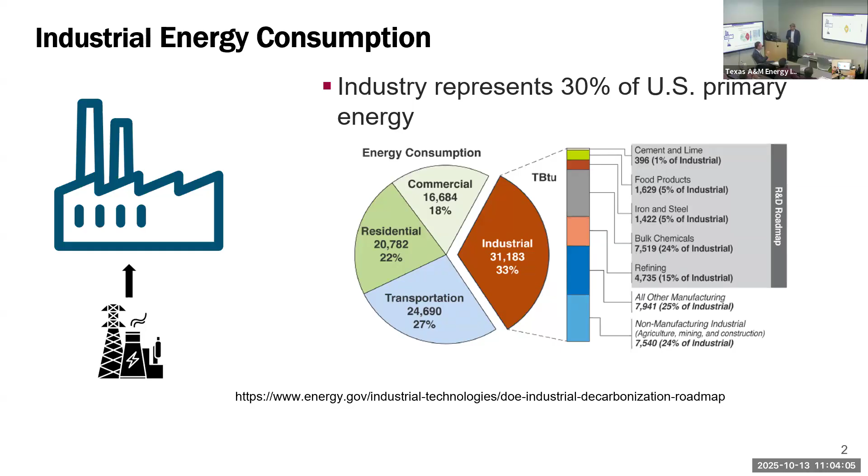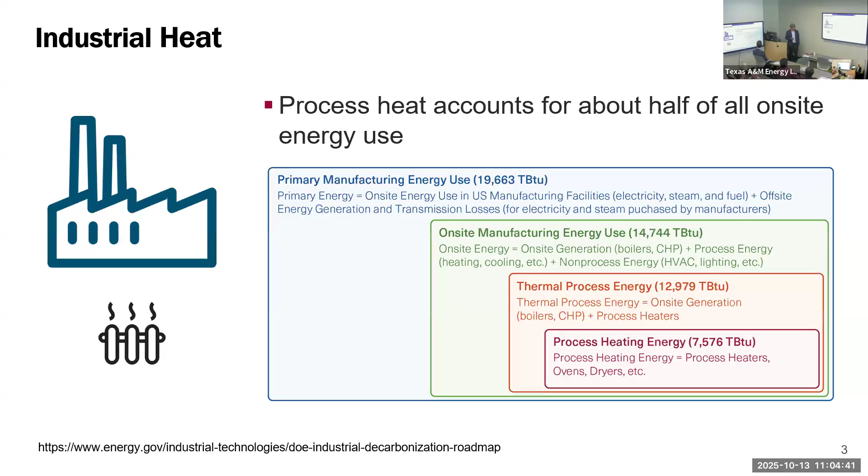That's our focus, looking at these energy intensive industries. Out of that 30%, about half of it is just used for heating things - whether you're trying to smelt iron and steel or bake bread, it's used for heating and reaching the process temperature. That's the focus of our institute. People sometimes think, is it very narrow? It might be narrow, but it's actually a pretty big chunk of all the energy use we address - anything where you're heating stuff up.

This is basically a Sankey diagram showing the comparison of where industrial process heat is used, breaking it down into various areas. Some of it you can also include refrigeration or cooling as part of heating, or temperature change as well - thermal transformers, as I see it.

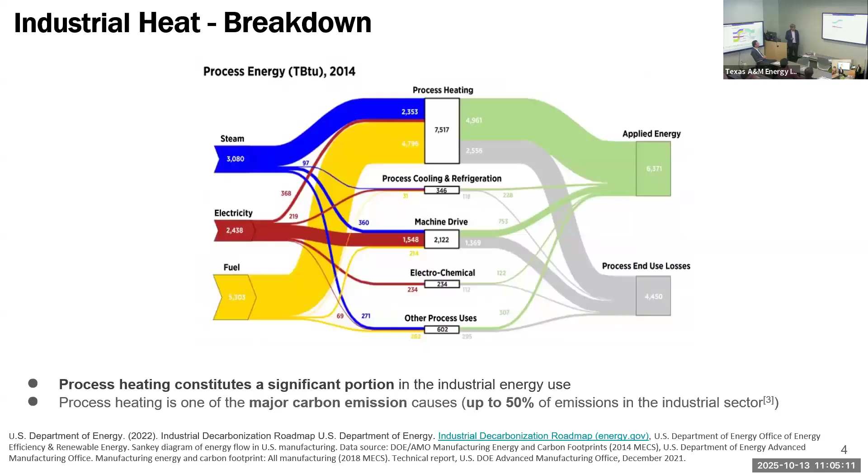The reason this is important is that for energy intensive industries, energy efficiency is a big part of their operating costs. The more energy efficient you can be, the more it adds value to your economics. This is our economic case - for energy intensive industries, it's very important to maintain your energy efficiency and be as flexible or low as possible in your energy costs.

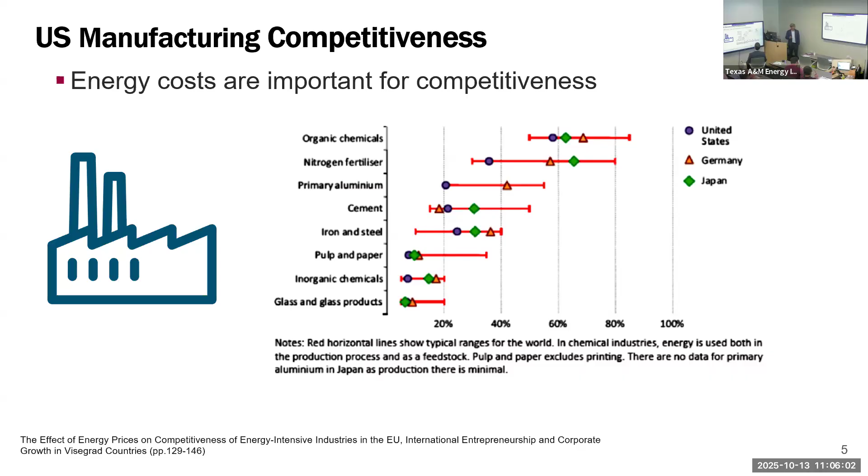This is a comparison between US, Germany, and Japan. We believe the US has a unique position in all the abundant energy sources we have, and how to optimize them in the best possible way in terms of powering your industries.

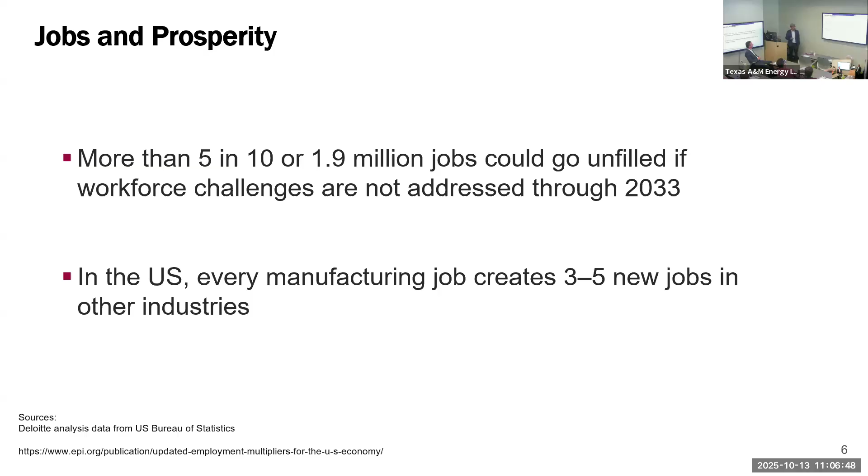As part of this, we're also looking at training people for these industries. There's a challenge in manufacturing - people aren't going into it, and every manufacturing job is a multiplier. For us it's an interesting problem too, because process heating, especially electrified process heating, requires more knowledge of electric power systems and power electronics - it needs electrical engineers in manufacturing, an industry mainly dominated by chemical engineers or material scientists. So it's a unique skill set needed by those manufacturers as well.

So why are we doing this? What are the opportunities and challenges? I've talked about the opportunities, but the challenges are such that whatever we do has to be economically viable - there has to be an economic case, we're not doing it for any other reason. The bottom line of the industry has to make sense. This is challenging because whatever technologies we support have to roll up to some type of techno-economic model, and there has to be a payback, whether that's 5 years, 10 years, or whatever. That's difficult because a lot of things are dynamically changing as we go.

For example, we're getting more and more different types of energy sources into the grid. In Texas, there's a lot of wind power. In Arizona, we have potential for solar at scale. The government is promoting nuclear, hydro, and geothermal - all that is getting into the mix, and they all operate under different conditions, so that's changing our grid mixture as well. We also have different types of grids being developed - islands, microgrids, national grids, behind-the-meter systems - all of those are changing too, developing different opportunities.

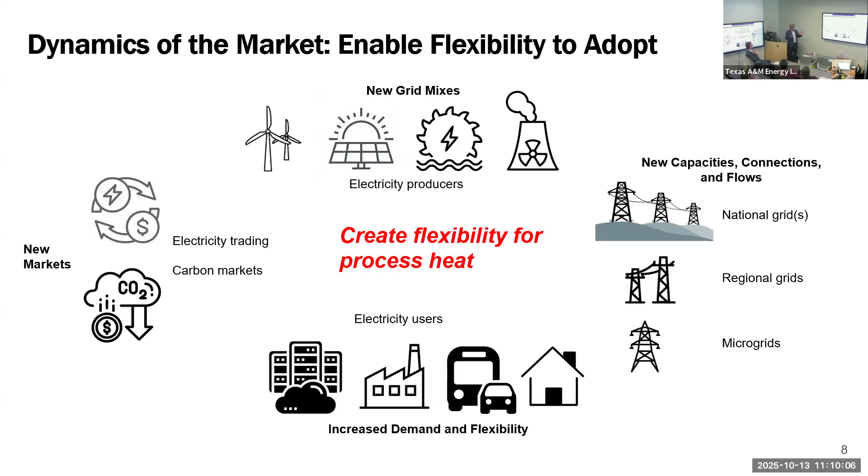So we need to adapt to all of these things as they change, and it's going to change the viability of technologies as things go on.

So basically, what we are looking at is how can you power manufacturing using all the various sources of energy and be as efficient as you can. If you look at the current government's priorities, it's hydroelectric, geothermal, nuclear, and also hybrid heating technologies.

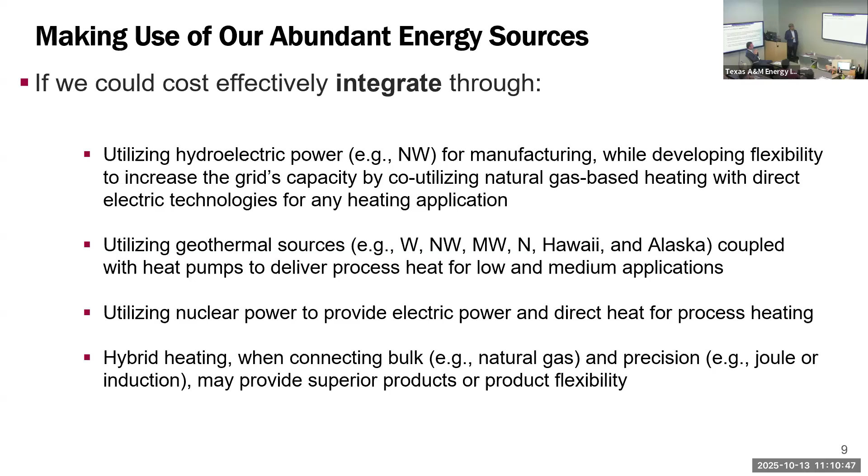So if you're looking at something that might be conventionally heated with combustion, can you precision heat certain parts with other ways and make the product better, or produce more flexibility in terms of raw materials? Those are the types of opportunities we are thinking about.

So what we are is a public-private partnership, and our name, which recently changed, is Electrified Processes for Industrial Excellence. When we first developed this institute, Mark and Stratos were part of it, and we developed this acronym.

We've tried to keep the acronym but change the name so that it reflects the priorities of the government. So we are the DOE's 7th Manufacturing Innovation Institute, and it used to be called Clean Energy Manufacturing Institutes, but the DOE has now forbidden us from using the word 'clean,' so it's Manufacturing Institutes.

And what we are is a public-private partnership. So we have over 150 companies, and you'll see why we include the entire supply chain—utilities, manufacturers, technology providers, etc.

We have a federal budget of about $70 million over 5 years—let's see if those 5 years last or not—and we have about an equal amount of industrial cost sharing or state cost sharing to do what we want.

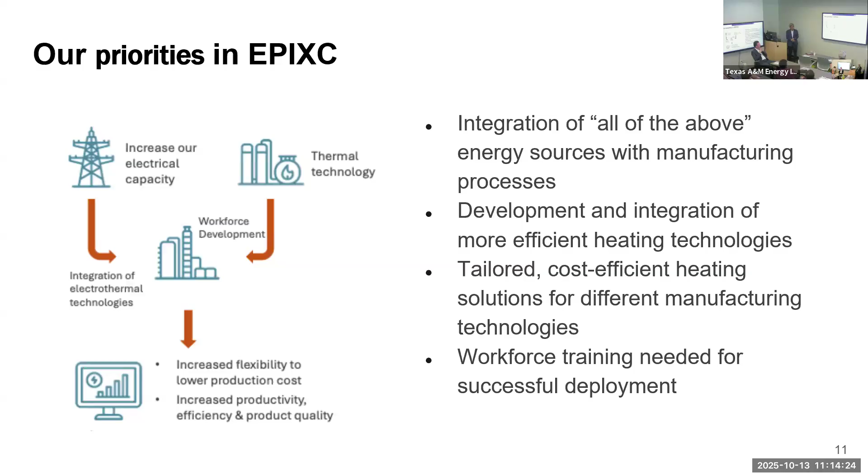And finally, we're also looking at what type of training do we need to develop to deploy these in the field.

So our mission kind of makes sense. It's basically accelerating the adoption of electric and hybrid heating technologies. But more than anything, we really want to develop an ecosystem where we bring in different players together that otherwise would not be working together. So how do we create that type of an ecosystem? You'll often find that it's not just a problem for the manufacturer, it's also a problem for the utility. So how do we get projects together where the utility finds a gain, the manufacturer finds some win, and the technology provider as well, to develop a systems level project that there's a win-win? That's the kind of sweet spot that we want to be in, not just one-off projects with a single company.

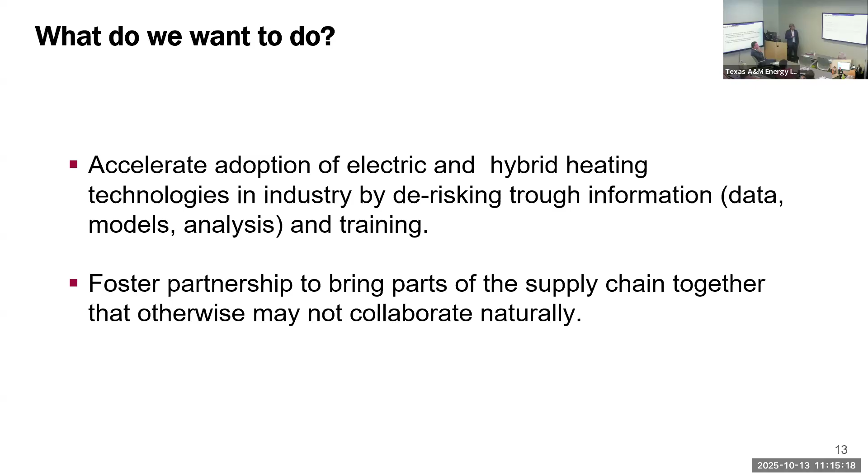So we want our technologies such that, in the end, they provide a cost-effective solution, either reducing operating costs, and also our solutions should be somewhat scalable, to various types of sectors.

Essentially, we look at it as if you have all kinds of sources of power. Some are intermittent, some are continuous. You also have all kinds of sources of heat, some continuous, some intermittent. How do we combine all of that to power the factory that we need or supply the heat needed, and then, of course, the integration of that heat into our manufacturing processes.

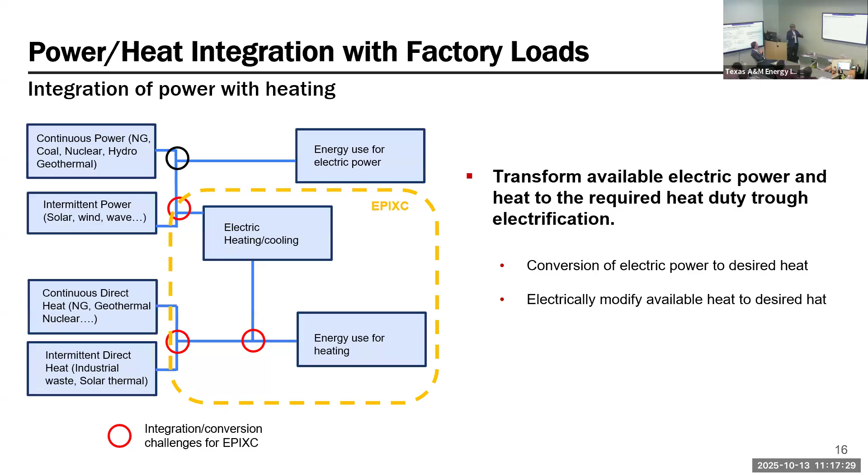Electric heating has some unique advantages and challenges because in combustion heating, you can flood an entire chamber and you know what the temperature is. With electric heating, you don't always know that, it's interacting with your material. If you're microwaving potatoes and carrots, they probably end up at a different temperature. So you need to look at how the dielectric and other properties, electromagnetic fields, interact with the material. All of that has to be looked at.

We are also looking at questions of that integration in terms of industrial flexibility. What would you want to do? Some industries want steady state operation, they want that power when they need it, not just when the sun shines or the wind blows. So there's an extra cost then, where you have to basically provide the base load, whether with some type of storage system or otherwise there's a cost to that. Other industries are interested in synchronizing their production with the power of the grid and the cost of electricity.

So that's the other way we are looking at it in terms of a systems problem. For example, there are breweries that operate boilers in tandem, an electric boiler and a gas-fired boiler, and they're able to switch almost on a day's notice based on electricity prices. Electric arc furnaces operate whenever it's the cheapest possible way for that electricity to operate, and what type of agreements they get with the power producer. So those are systems level problems they're interested in.

At UT Austin, they're also doing some interesting things in terms of grid synchronized distillation, like can you separate different things at different powers depending on the power usage and the power costs?

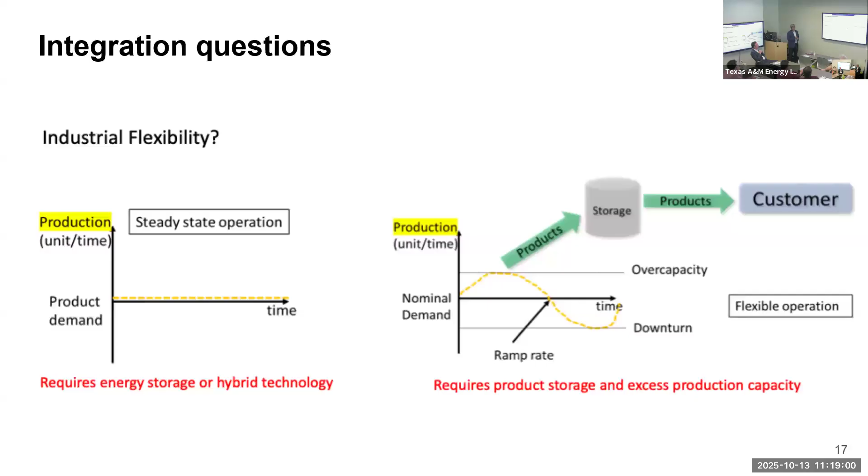So originally when we stood up the institute, our goal was to a large extent decarbonization. Our projects all had a metric that said cost of carbon abatement — you're going to abate carbon, now what's the cost of that, can you bring that down? That's no longer a priority for the DOE or the US government at the moment, so we had to pivot. Our primary metric right now is efficiency. The way we're looking at that is per unit energy spent, can you produce more products? If you're spending a certain amount of kilojoules or watts, can you increase the amount of products you're producing for that? That's our prime metric.

Now, those of you who are thermodynamicists, see, there's a fallacy there. If you just operate near the second law, you don't produce anything, but you'll be very efficient, right? So you do have to maintain a certain productivity — that's a caveat there. But that's our baseline for being energy efficient. And it's not that difficult in a way. This has given us opportunities to work on some areas that we couldn't before.

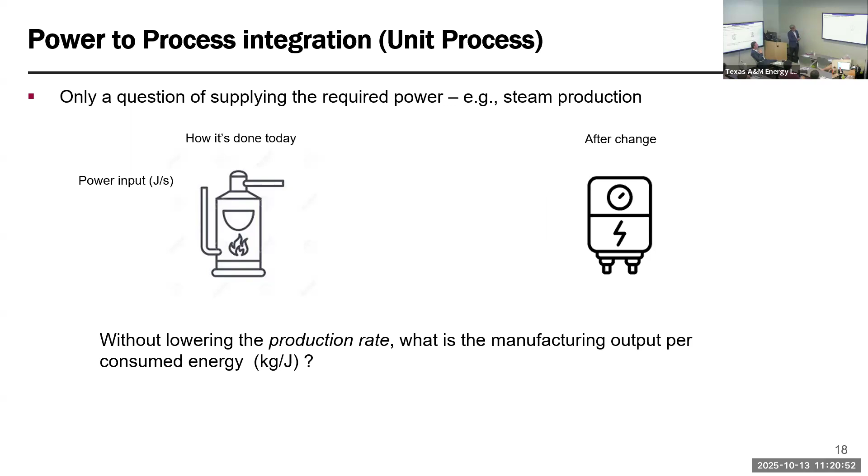If you take things like battery slurry drying, for example, it's not a big decarbonization problem, so we couldn't get into that. However, if you're replacing slurry drying with, say, laser technologies, you can produce much more. Even though the electricity price is higher for laser-based heating, your throughput is higher, so that's an economic interest. We're able to get into areas that we couldn't get into before because of this as well. So that's the very basis of what we're thinking about.

Now we have to think about some other things here. There are some non-energy challenges and opportunities as well — it's not always a one-to-one replacement. If you take my own area, say iron and steel, one big area of energy intensity is rolling of steel. There are opportunities — you'd be way more energy efficient if you could induction heat a coil, because you're just heating what you're heating and nothing else. You'd almost reach the thermodynamic limit. But the problem is you don't know whether you're getting that same quality, so we have to make sure the product quality is the same.

In some cases it could even be better, because you can heat what you want to heat at the temperature you want to heat, so you might be able to create microstructures that you couldn't before. As an example for steel making, you conventionally heat it in a reheat furnace in a combustion atmosphere and end up with a lot of oxide scale. That also limits the amount of recycling you can do, because steel scrap contains copper, and when you oxidize the surface, that copper prevents you from making high-grade products — it creates cracks on the surface. That's probably the biggest problem for scrap-based electric arc furnace production.

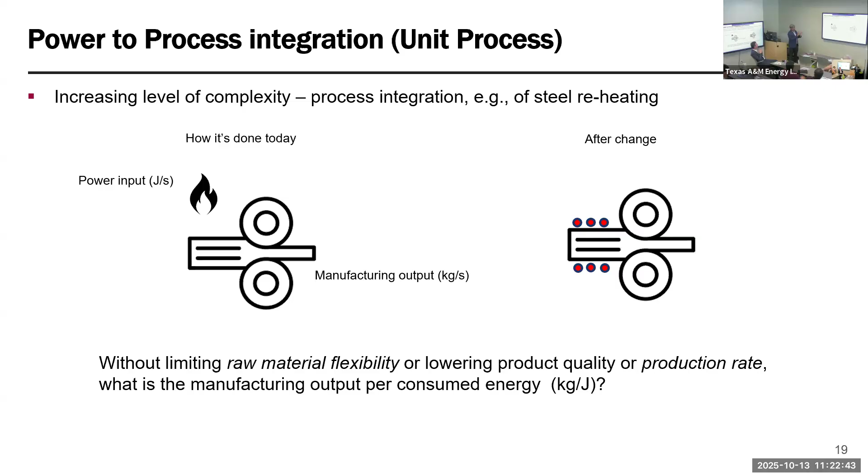Now, with electric heating, you could potentially operate in an entirely inert environment, where you don't create any scale, and you could get a better product out of it. Even downstream, if you're looking at annealing, you could create all kinds of quench structures that you couldn't before that would add to your product value, so to say. So those are the kind of opportunities we're thinking about.

Now, in a systems-level integration, if you go one step higher, you can't just limit it to that one process — it's not a one-to-one replacement. You have to think about the fate of the fuel gas, heat integration, the available power. Somebody mentioned very accurately that most plants have already done their pinch analysis, so whatever heats and sinks are going on, you're using it somewhere else. By electrifying one part and not using the rest of it, you might have to provide more power. Any of you who have an electric car and try to use the air conditioning or heating know it doesn't last as much as a gas-powered car — it's pretty optimized, so you have to look at it from that point of view.

On the other hand, you might get gains, such as fewer moving parts, process flexibility, all that stuff that has to be replaced. Some interesting questions have come out of this that we didn't think about originally — one of the limitations from industries to adopt technologies is sometimes not even the cost, but it's the downtime.

It takes a certain amount of downtime for them to replace their systems, and there's a loss of productivity there. One thing they've asked for is, can you create a model for us, depending on the facility, that would predict the expected downtime to replace equipment? Take something simple like a boiler for a beer producer or distillery - how long would it take to replace it? That includes all the logistics, since sometimes parts come from Denmark, Sweden, or Norway. How long do we risk not operating, or do we wait till something's broken anyway? Those kinds of questions have come up as interesting problems for us.

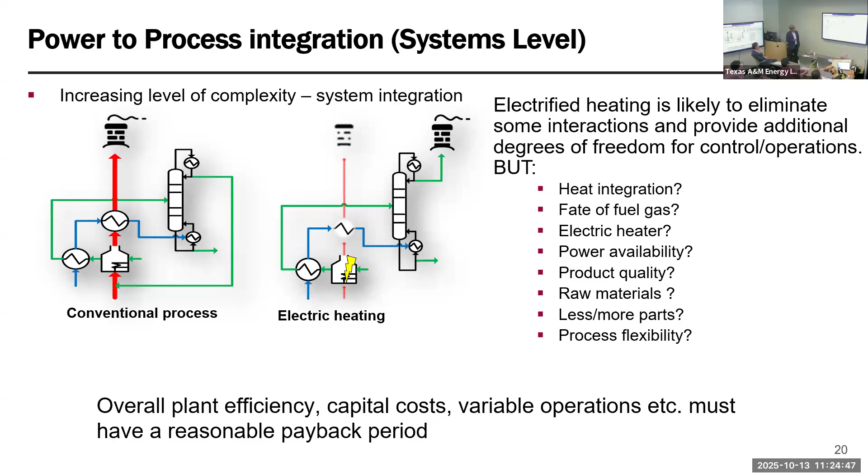As a summary, any project we do primarily has an energy impact, and then there's a non-energy impact as well. We also had a non-energy impact on emissions - but that's another word I can't use anymore, so emissions is not in my vocabulary. In the end, you can imagine you also get less particulate emissions, whether we want it or not.

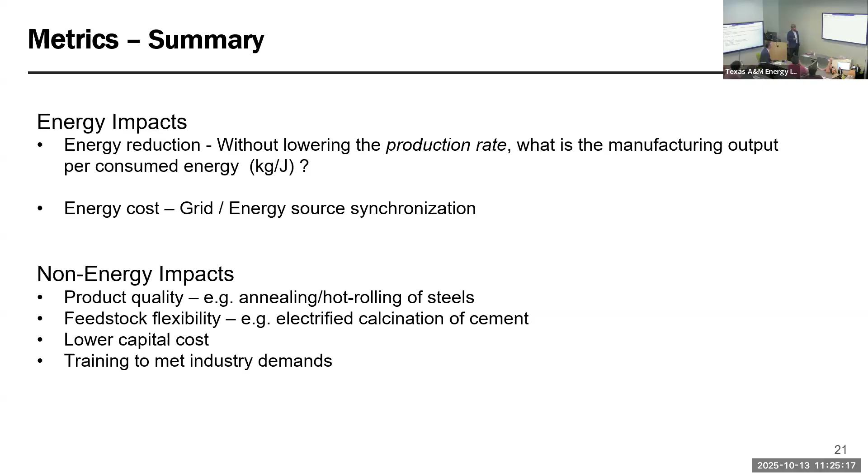Workforce challenges - so I don't look this way, but I'm actually Swedish. This is in the very, very north of Sweden. If you think about where you'd produce and have the next industrial revolution, it would be there. You have over 70 terawatt hours of electric power, and almost all the natural resources you need in terms of mining and ore. Problem is, if you've ever been there, there's more reindeer than people - there's nobody to work there.

So the workforce is a problem. We've created our educational institutions around where there was coal, water-based resources, stuff like that, but those aren't necessarily where industry is growing. My own interest is iron and steel - if you look at where all the major iron and steel educational hubs are, they're all in the Northeast. But guess where it's growing faster? It's actually Texas in the South, and you don't have a single steel hub anywhere around these areas. So there's a redistribution, and people from the North don't necessarily want to move. There's a workforce challenge.

We can develop a perfect place to build a factory, but it doesn't mean we have a workforce there. I was in Oklahoma a few weeks back, and one of their questions was, we have so much abundance of natural gas, why don't we become Texas in terms of a manufacturing hub? But one limitation is they don't have the educational institutions like you guys have here - training people and the workforce is a limitation for industrial development.

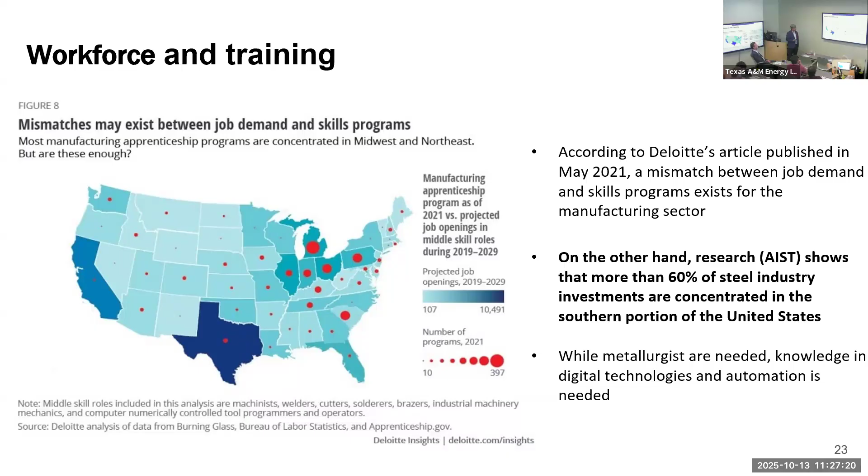This is a graph I put together for AIST, the Association for Iron & Steel Technology, that basically shows where the educational programs are - all in the Northeast - but the growth of industry is along the South and Texas. There's a mismatch there. That's a case I'd make for the government, that they need to redistribute educational programs more to Texas and the South.

We do have a manufacturing education program within EPIXC as well, partnered with the other 18 or so manufacturing institutes. We develop skills from the very base level all the way to PhD in all kinds of ways. I wouldn't say it's that well developed yet, so this requires some work, because a lot of these institutes are put together by academics and scientists who don't necessarily know how to train apprentice programs and pre-apprentice programs, which is really what we need.

Any thought about dual vocational programs, Sridhar, or emulating the Germans, since I know you're familiar with them?

We have tried some of that. One challenge, I guess - and we've talked about this with the institute director - is that in Germany there's a culture for industry to take pride in doing this. You can call up Thyssen or Salzgitter and say, hey, we're doing this, and they'll feel shamed into supporting it. In the US, it's so difficult to get industry to actually buy in and commit cash to programs like that. We've tried with Motiva, we've tried with all kinds of industries, but for them to actually join a program like this and pay for education is a challenge. At least three US presidents have spoken about the value of dual vocational programs, starting from the Obama administration.

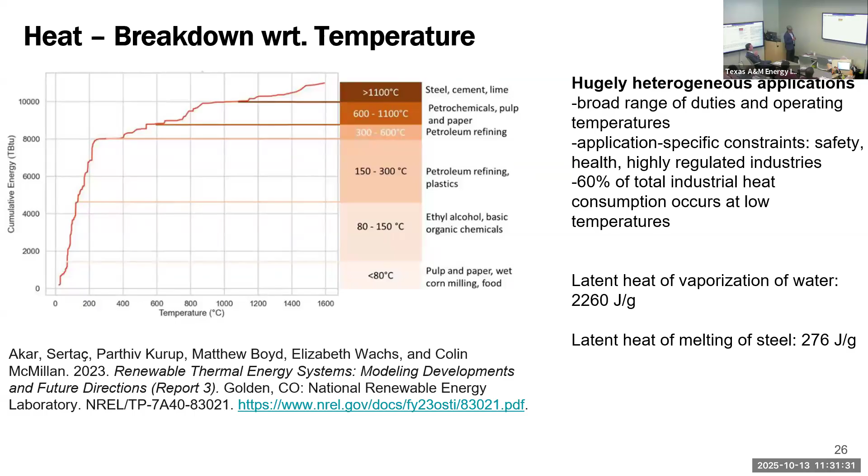I'll show this graph later, so I'll come back to that.

So we're also thinking about what might be co-benefits of electric heating, and I mentioned some of this before. You can control the heating where you want, how much you want, much better. And you might have a lower cost of capital for parts, and you might be able to differentiate your product, as I mentioned earlier.

So our goal is to look at - there's going to be a higher price, especially in the US, it's very difficult because of natural gas prices, right? I was over in Denmark a couple of years ago for a US government trip. Denmark's industry is all electrified, so is almost Holland's. And we were trying to understand how they made it work economically, and whether any of that could be replicated in the US.

So first they'll tell you all this stuff about moral commitment, ESG, all that. But if you keep asking them, that's not it at all. It's because the EU has very strict rules that they have to decarbonize. So they don't have a choice. So they have a 10-year rate of return for the technologies.

Second of all is Ukraine - they don't have the cheap natural gas they used to have. Third of all, they have this enormous battery from Norway and Sweden of hydroelectric power, and then they can base that and supplement it with their own wind and solar to basically be carbon neutral.

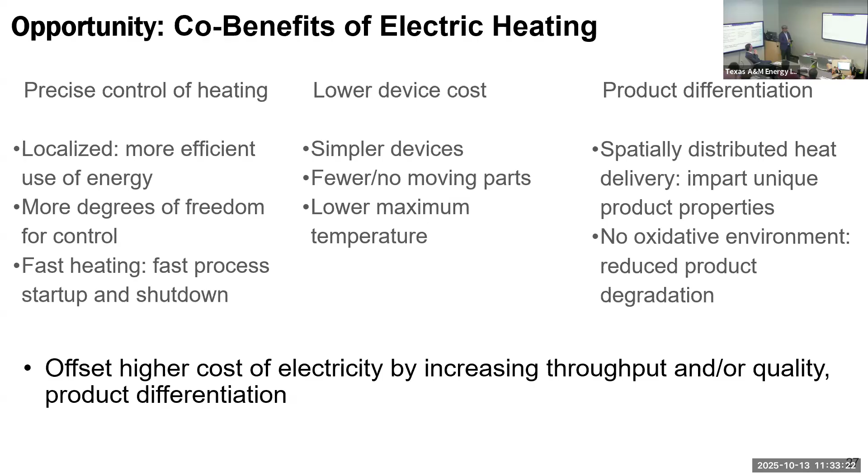There's an economic case there. We don't have that in the US, and the US is so broad that there's differentiation wherever you go - there's diversity in electricity sources. So we have to think about it as a regional problem, right? If you're in the Pacific Northwest, you might have access to a lot of hydroelectric, but the rest of the country is dependent to some extent on intermittent sources, and beating natural gas is hard.

So in terms of our roadmap, one of the things we looked at is, if we look at many of the different things our stakeholders are doing in terms of processing, and then looked at the average heat duty per kilogram product, what are the areas that would make the biggest impact? We found that the major source of energy use is just making steam, for all kinds of purposes. It's not that much of a romantic problem to look at compared to, say, iron and steel, but because of the vaporization energy and the latent heat of vaporization, steam is the biggest source of energy usage. That's been a focus for us.

Steam is also, to some degree, a lower hanging fruit for us because there's a lower amount of risk. You produce steam and move it somewhere else, but the manufacturing process doesn't care how that steam was made - whether you heated it with natural gas or electricity, it's still the same steam, barring some water quality issues. So it's lower risk. Whereas if you're thinking about integrating a plasma furnace for heating or something like that, there's a lot more risk because you may cause all kinds of issues in the manufacturing step itself. So steam usage seems to be a lower hanging fruit for us to work on.

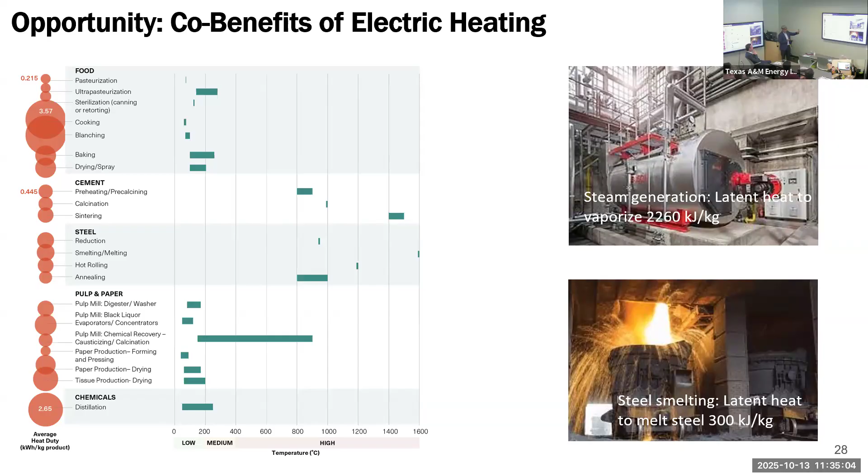Now we looked at all these different heat duties - this is how much heat it takes to make something - and we tried to match that with the different heating technologies available and what they can achieve today. There's a limitation to what is reported in literature. For example, heat pumps, electron beam melting, whatever you take, there's some limitation that allows them to only go to a certain degree.

What that limitation is, is interesting. While we can't go into that granularity, I think it's an interesting question because it may have to do with the power systems, the power electronics that can power a plasma unit. It might have to do with the alloys that work as a heat exchanger. But there are all kinds of reasons why these are limited to a certain power.

One very interesting question that came up in one of our workshops a couple of weeks ago in Austin was that one hesitation companies have in adopting these technologies is the supply chain. These supply chains don't always exist in the US - they come from abroad, and we don't even have the automation engineers or repair engineers to repair a lot of these technologies that come from Danieli in Italy or from Japan. So that's a hesitation they have. Even heat pumps - a lot of them are produced by Danfoss in Denmark, and we don't have the repair engineers to put those in. So that's a hesitation industry has from adopting them.

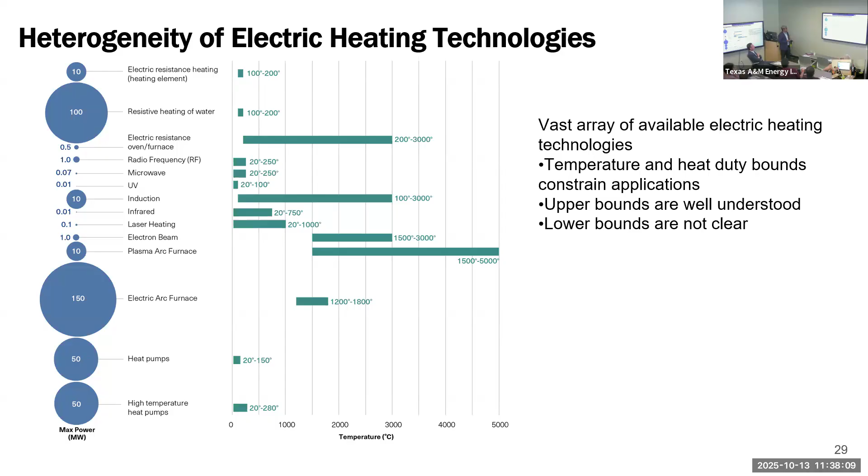So that came up as a prime reason why industry is not adopting them. Many steel industries, for example, demand that you have 2 or 3 alternative suppliers for a technology before they adopt it - it doesn't matter if the technology works or not. And we don't always account for that.

This is a graph, or a chart, that my colleague Michael Baldea from UT Austin put together.

This is where we got information from all our stakeholders, but there's a lot of white area here that we don't have information about. It doesn't mean it doesn't exist, but there's stuff we have to complete in terms of other technologies that can achieve certain things that just haven't been reported yet. There's no physical or thermodynamic law saying they can't do it, it's just not been explored yet, whether those areas can be looked at in terms of technologies.

In our legacy industries, it's still looking for alternatives? Absolutely. For reasons that may not be obvious, for example the steel industry in the US. There's also an interesting problem in England. I was contacted by Wales because they're trying to put in an electric arc furnace, and somebody asked, can we buy an electric arc furnace? Sure, you can buy one, but you need the power to power it, right? That's the problem. Everybody can buy an electric arc furnace.

So they're trying to look at Swansea Bay and all this stuff in terms of what they can do to power that system. I have my doubts, but we'll see. In the US we operate around 110 or so electric arc furnaces all around the country, and these are the mini mills, as they're called. They're at such a scale that it doesn't make sense to build an entire power plant like you can in an integrated plant, which are actually energy producers, right?

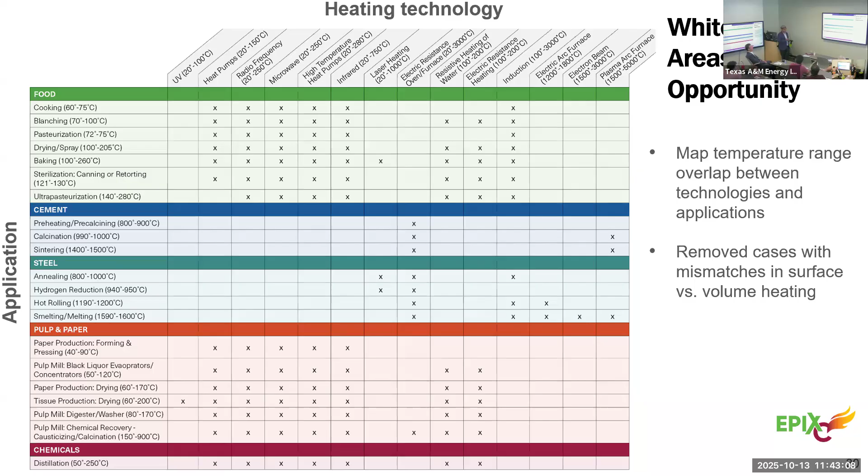So some of our ongoing research, I just want to highlight. Let me know how much time I have? Five minutes. Okay, I'll finish quickly.

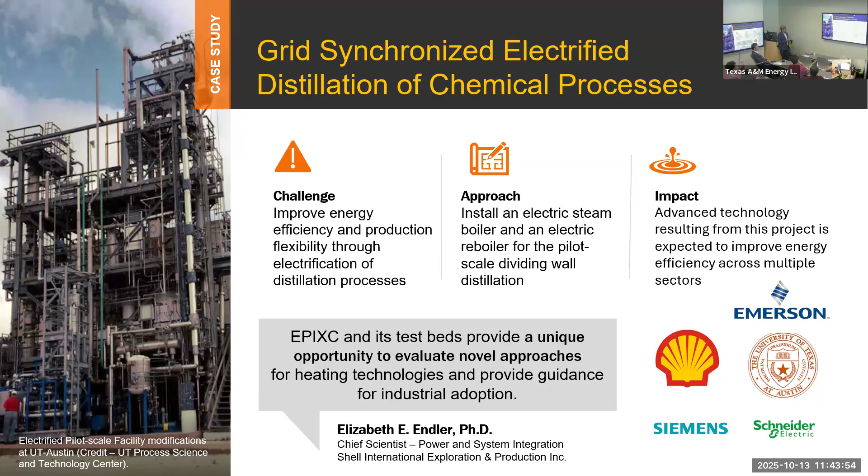So essentially, we are looking at distillation with e-boilers in tandem with combustion boilers to see if we can produce different products at different power systems, basically synchronizing production with the price of electricity. This is the system being built at UT Austin. If you ever go there, please have a look at it.

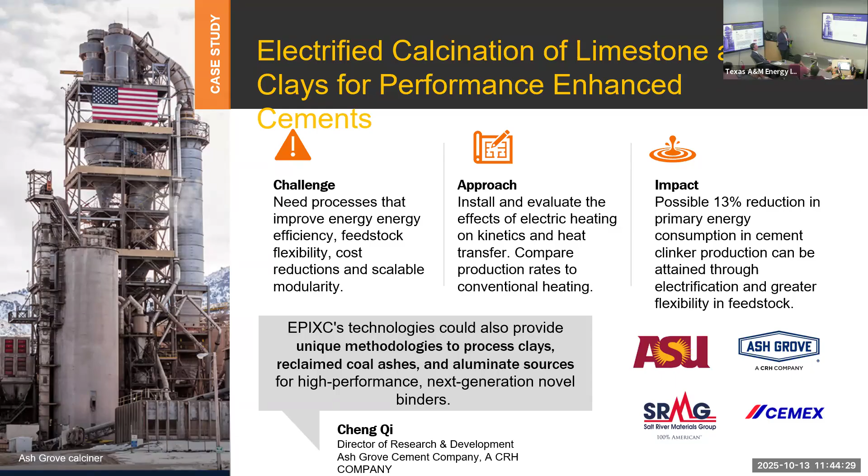It's pretty cool. Another project is being built at ASU - it's basically a calcination reactor, an electric calciner. The value is that with electric heating, you can have more uniform heating, so you can use a more flexible set of feedstock, like clays and stuff. That gives you feedstock flexibility which gives you overall product cost effectiveness.

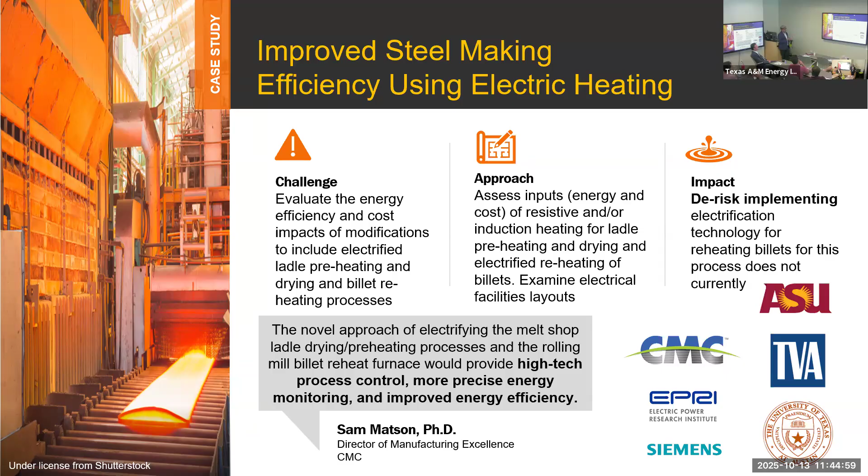Just a kiln. This is a project in Tennessee, a collaboration between TVA, CMC Steel, EPRI, and Siemens, where we are looking at electrifying the reheating process and preheating of ladles and coming up with an economic system to make sense of that. They have a decarbonization goal, so that's part of their incentive, but whether we can present that to DOE or not is different. We are building a pilot scale rolling mill that's actually heated by resistive heating and induction heating, and this would really be the first one of its kind.

Few minutes left. In the end of the day, I'm a scientist, so I have to show something geeky, some research stuff as well. This is actually not funded through EPIXC, it's funded through basic energy sciences.

One of the biggest problems the steel industry faces - you've probably seen a lot of literature around H2 DRI and stuff - is that it cannot be scaled. The reason is that DRI relies on very high-grade iron ore. If you produce iron ore that has a lot of gangue in it, that cannot be cost-effectively processed in electric arc furnaces. So if you wanted to look at an alternative way of making iron and steel, it doesn't work.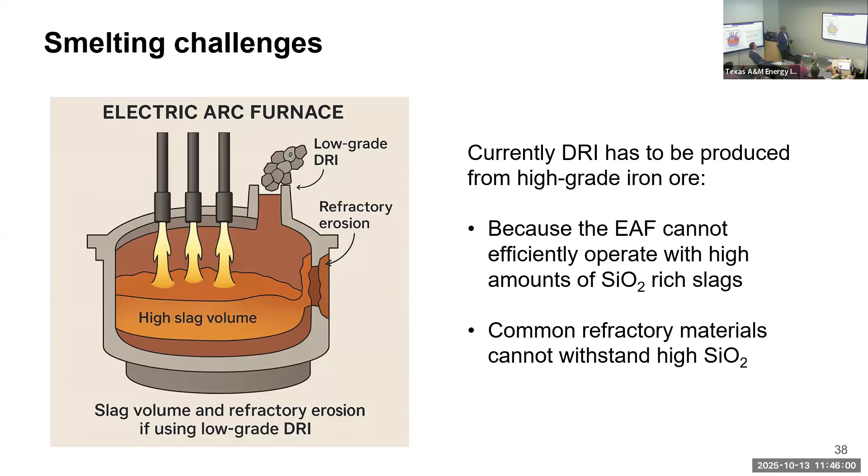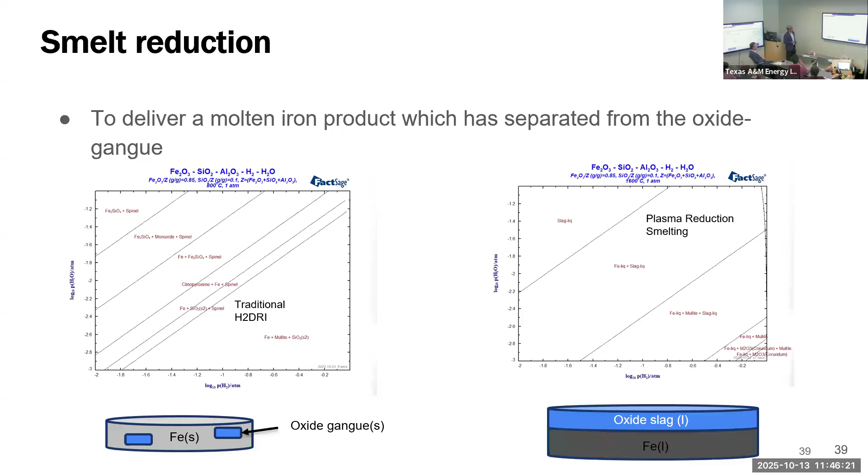The only way to do it is to develop a smelting technology where you separate the iron product from the gangue. Ultimately, traditional DRI produces iron, but it has a lot of gangue inside it that cannot be used in the electric arc furnace. What you want to do is produce a product where the iron is separated from the gangue. One potential way of doing that is plasma smelting.

Plasma smelting has two advantages. Number one, the radicals you get have a higher kinetic potential for reduction, so you could operate at much higher efficiency. It also provides the power, the amount of energy to basically melt everything. And the molten oxides, which are like lava, are immiscible with the iron. So that's a technology we're looking at.

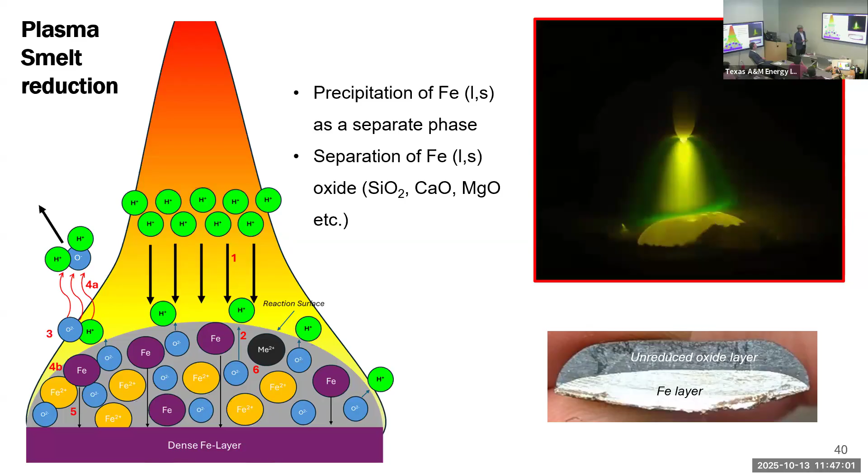It's not funded through EPIXC, but by DOE's Basic Energy Sciences, and UT Austin is part of this as well - they're doing all the plasma modeling. This is just a sample that we produced out of that process.

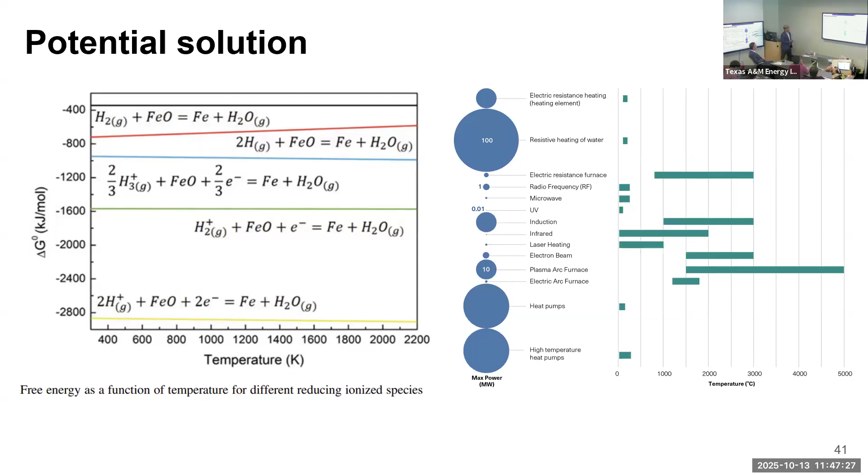Some advantages of plasma smelting are that the free energy becomes exothermic as opposed to endothermic, so the energy efficiency is there, and you can make use of these particles. Plasma, on the other side, has the potential of scaling up to the amount of power that you want. There are some power electronics limitations, but plasma itself can do it.

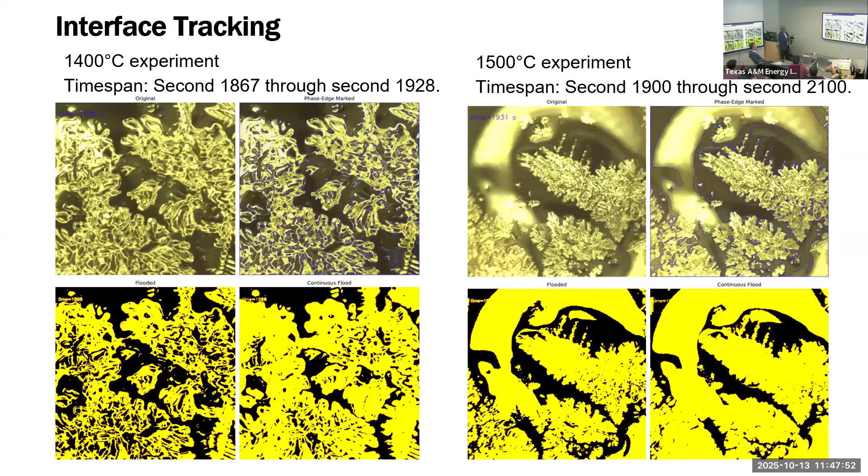This is just examples of the reduction we've done, and we've shown you can improve the kinetics with plasma. We also have ways of imaging how the metal precipitates at high enough temperatures - this is real-time imaging of how iron crystals are produced out of molten oxides, some cool images of high temperature microscopy that I have to show.

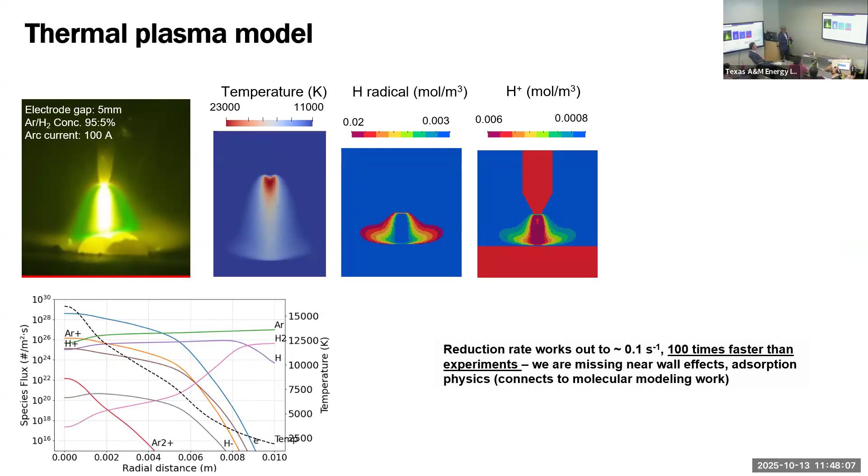Anyway, so plasma modeling of the reactor is done in Austin, and they're connecting with the metallurgical model. Since it's basic energy science stuff, we have to get into all of that.

I'll summarize there. So basically EPIXC is an industrial consortium - it's for industry, run by industry - and we are trying to take advantage of advanced electric heating for the benefit of industry. At the moment, chemicals and metals are our main core sectors. Some underdeveloped sectors we are looking to develop is food and beverage - we don't have enough food and beverage companies, but that's one thing we are trying to move into. And we're open for any US-based organization to join. Thanks.